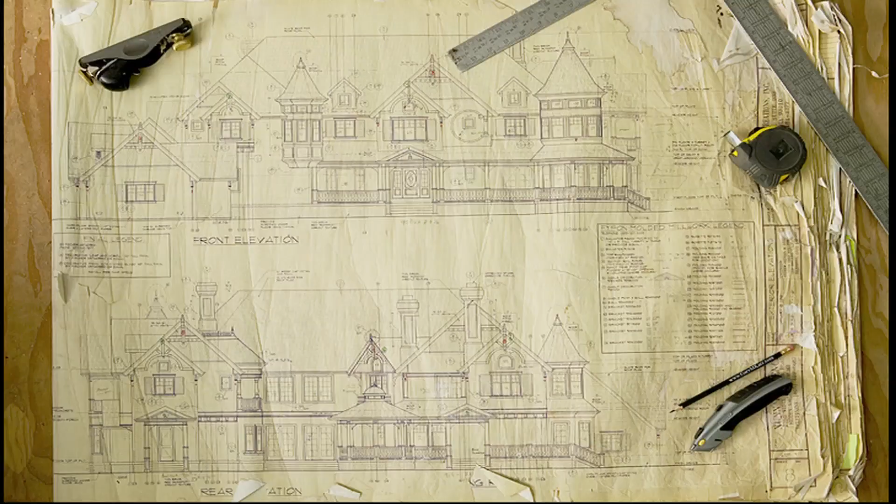Tell me the story, I know so many people don't realize that you were Stiletto, and still are in some ways, because it was you and Jimbo that actually originated that whole design. Yeah, and thanks for asking me that too, because a lot of people are confused about my involvement with Stiletto. I own Stiletto 100%, and anybody that worked for me was an employee. Stiletto was about the fact that I had this great idea and brought titanium to the market, but I was working to become successful, to make money, do all that.

Well, that's been done. What Martinez is all about is my legacy. I'm here to try and make the best tools and concepts that I possibly can, and Martinez is about taking guys like Jimbo. Jimbo was the original engineer for all my Stiletto hammers, and so him coming back over and working with Martinez is just the icing on the cake.

So this is basically heaven, because you're no longer driven by this monetary need and establishing a business. Now you're doing just what you think is right. Exactly. And once the monetary left, the creativity window just opened up unbelievable, and it's something that is amazing me, the responses of my end users and the feedback.

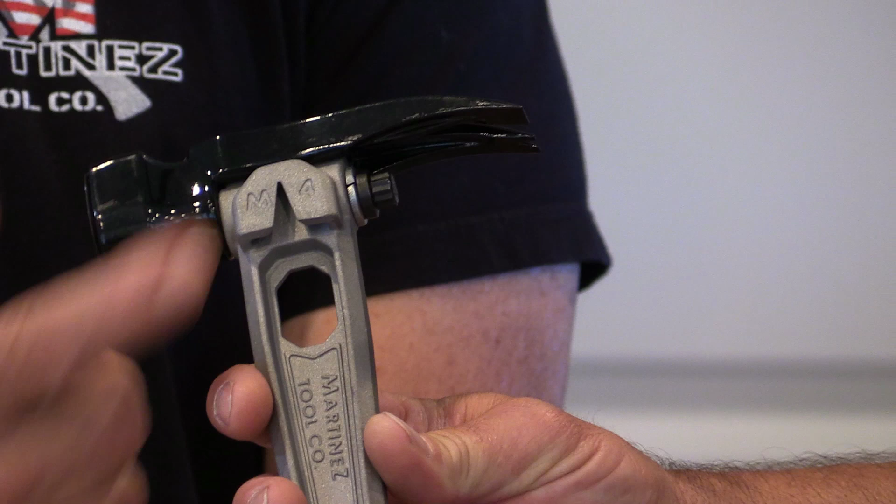The side nail puller is invaluable if you've ever pulled a nail, because you have 10 times more leverage with a side nail puller than you do with a claw.

Another feature that's really important on the M1 is the face is tilted back at approximately 5 degrees. The reason for that is nobody pounds a nail straight up and down, it's at an angle, so this is hitting square. You might not think that's a big deal, but that 5 degrees puts more of the surface of the face of that hammer on the nail and drives it faster than just a square face.

Only our framing hammer has the slanted face, because in framing you want to get as much on that nail as you possibly can in a production framing environment, to get the nails to sink as fast as you can. Every swing counts. Whereas with a finish hammer, that's not the case.

The M1 weighs within 2 grams of its competitor in titanium. Now with it weighing within 2 grams, most people pick it up and go, oh this is way heavier than your other one, but it isn't. What's happened is we've moved the weight from overall and put all the excess weight just up in the head, where you need it.

Because then you have a swing weight. Exactly, whereas before, with the other one, it doesn't have a swing weight. And what we were able to establish is that this swing weight ends up having a third more driving force than my previous designs.

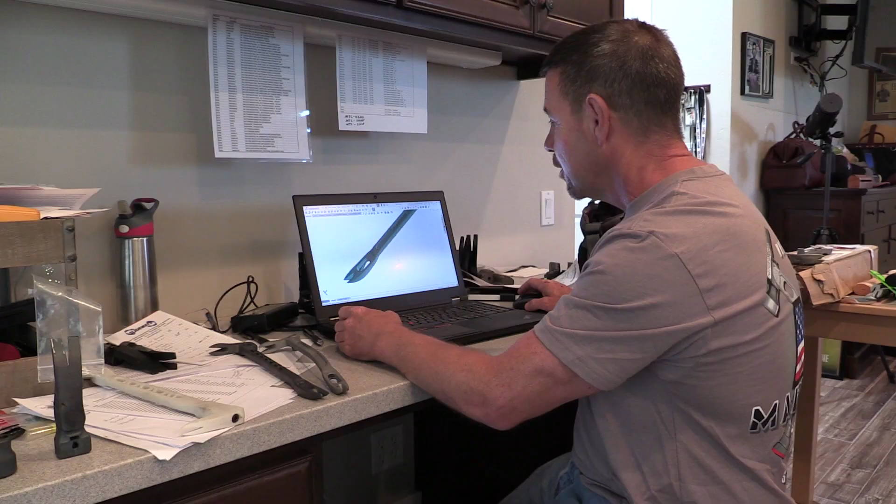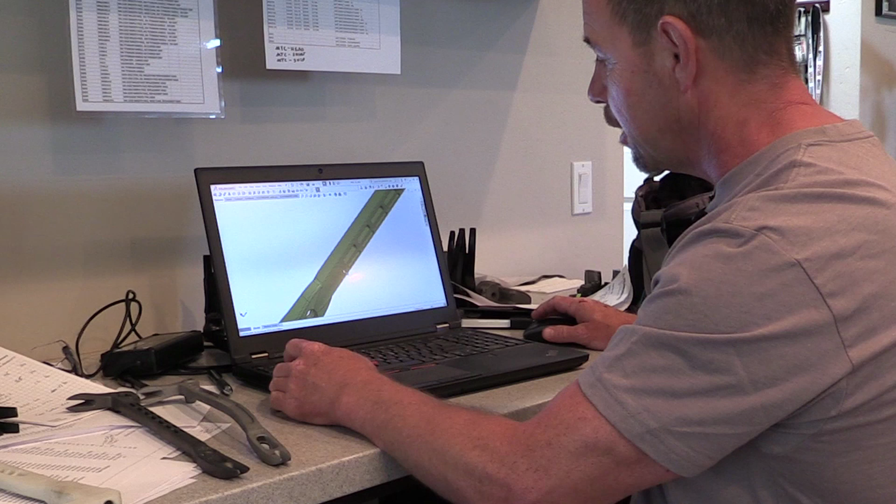Our first evolution of the new nail puller, we came up with this cross section of the handle. As you can see, when we jumped up and down on it to test it, it bent. So we came up with a new cross section with ribs underneath and on top, but all the highest stress and bending is on the outside surfaces. So right in this area here, and right here, we added skin strength by adding that section.

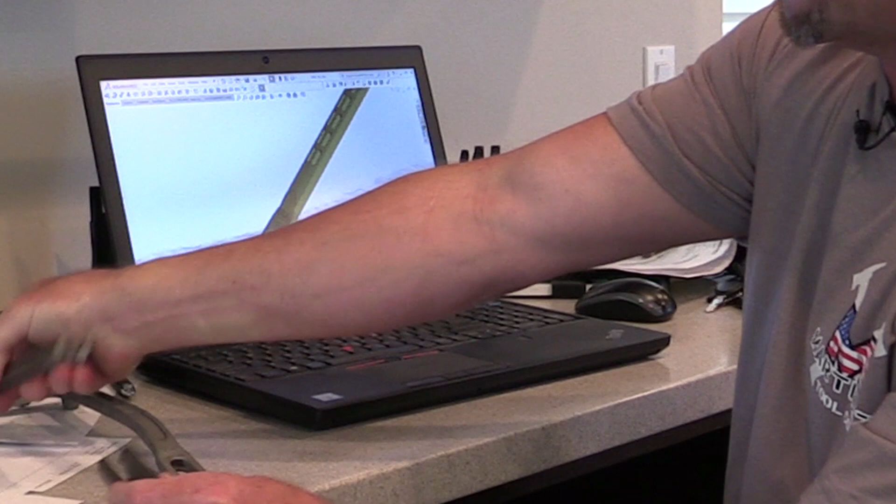So then we put a little different load on it and loaded up this area right here, and as you can see, when I was jumping up and down on it like a diving board, it snapped there. So the next evolution will be that we've added more material up here, right in this weak area where it's the thinnest section.

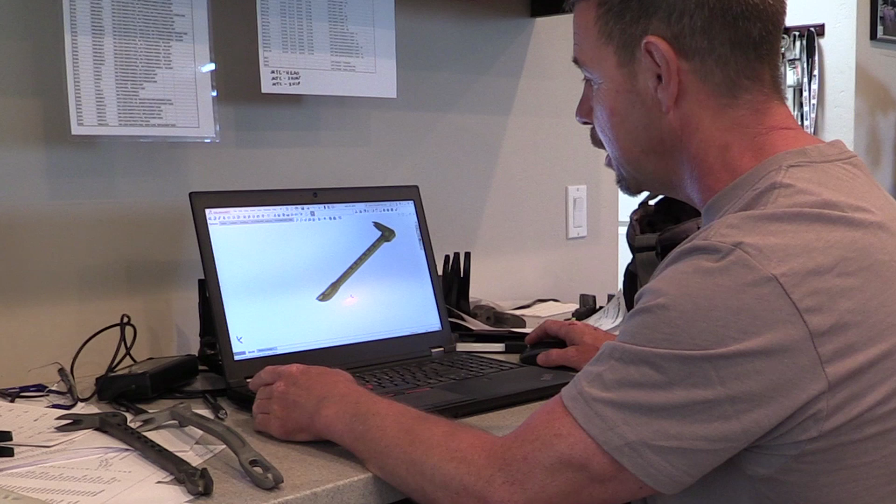That's our version 3 of evolution, which will be the new Martinez steel nail puller. It's got a side nail puller here, and this acts like another side nail puller, so you can get it started with the cat's paw, then pull it out completely all over the top using this secondary nail puller.

So we'll call for a new SLA and get this one poured out and tested within a week or so. Once we establish that, we're off to the races and this will be on the market.

Here's some of those SLAs from when we started coming out. What does SLA stand for? Stereolithography apparatus. Okay, what does that mean? A 3D printer. So that's the SLAs, that's the proper term.

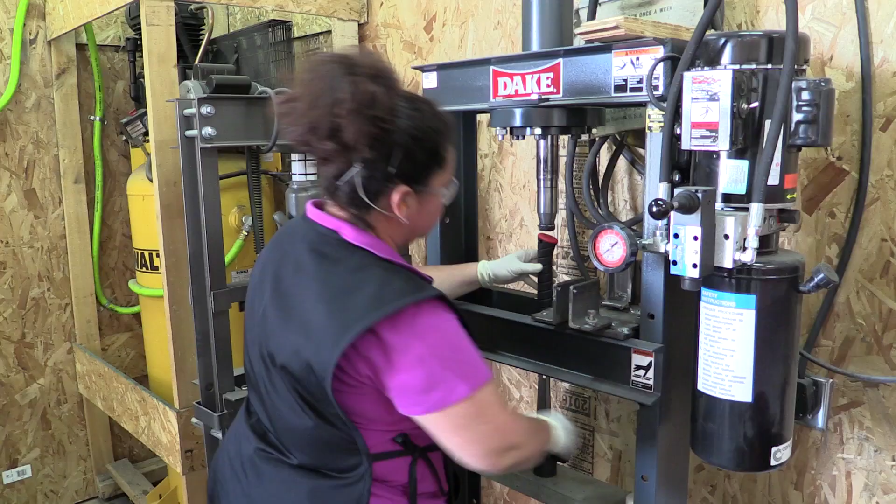These are my ladies. This is Teresa, Hi, and Tina. They are responsible for putting together all the Martinez hammers. So if you own a Martinez hammer, more than likely one of these ladies built it for you. They built all the Stilettos when I owned Stiletto, and I'm really happy to put them back in employment and happy to have them back. They're the joy of my life, I love these women.

All right Jim, so I know you guys make a lot of wood-handled hammers also. This is the machine that you made to drill out these wood handles? Right. How's this thing work?

So the challenge is we have a bolt coming down through the top that has to go through a threaded cross dowel here in the middle. So to try to do this freehand and line it up to where this hole will intersect that hole, it's kind of tough. Forget about it, especially over and over and over.

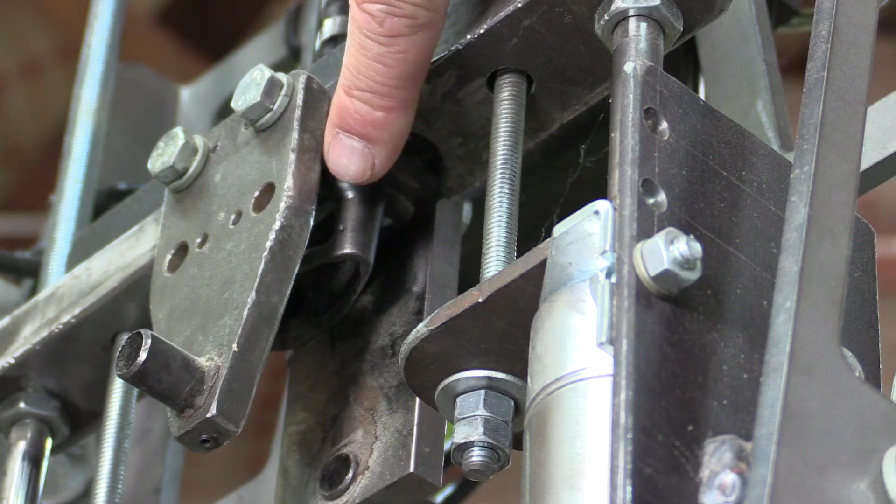Right. So what I did was I came up with a device here that has a press that cut off a hammerhead and welded it up inside of here. Genius. So then to set it up, you put a hammerhead up inside, and this is a press that holds it down in place. Then I have another linear guided cylinder here that runs an air motor.

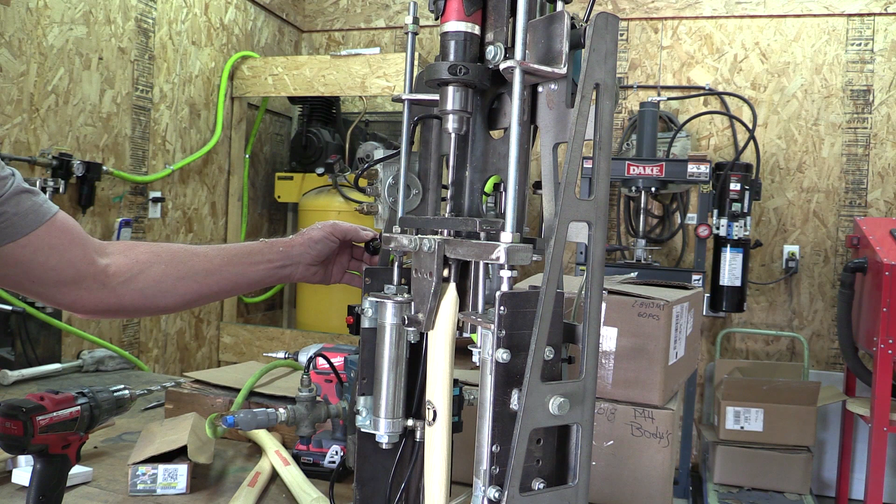So once it goes down, it starts drilling a hole. But first, you use a hand drill and you drill the cross hole. Use that little bushing right there to guide you? Yeah, a little drill guide bushing. Cross hole, and then the top hole that intersects it and lines up.

So you must be one of those hands-on engineers. Yep. I grew up in a family of engineers from Oregon State, 6th to graduate in my family. Wow. And I started welding when I was 8 years old and been building stuff ever since.

I had a guy who wanted to send his hammer back, and he wanted some stuff done to it and everything. So he kept calling me and asking me if his hammer had arrived. And I kept going, no, it hasn't arrived. But I had received a package from somebody, and I didn't know who, didn't know it was him, and there was this great big piece of LVL with his logo on it.

And I'm going, what in the world kind of package is that? I don't know. So I threw it in the corner and wasn't paying any attention to it till one day I looked at Jimbo. Jimbo goes, throw it up here. So Jimbo opens it, and when we took the screws out of this plate, lo and behold, his hammer was inside. He shipped his hammer in an LVL? He shipped his hammer in an LVL.

Now, is that the coolest shit you've ever seen? Come on. Pretty much the coolest shit I've ever seen. Yeah, with a steel plate. Yeah, and you know, that is what Martinez Tool is all about.

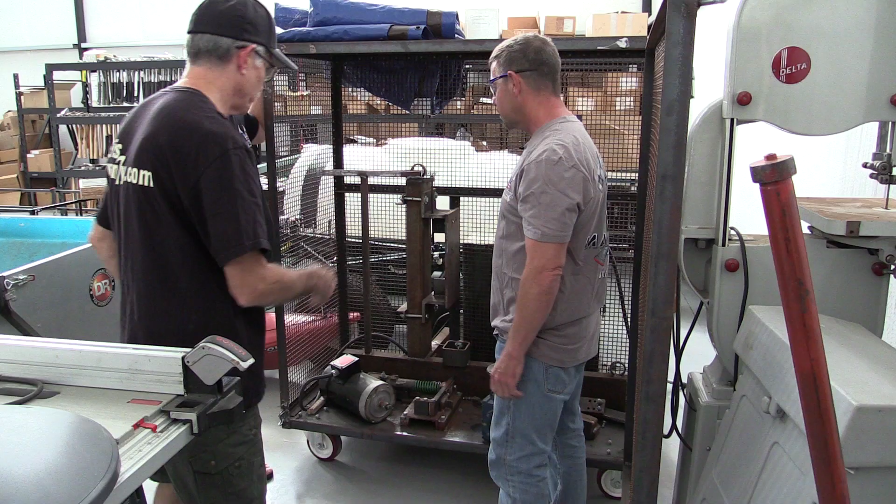So what is in this cage here? This is Thor, okay? Thor. It's our hammer testing machine. We've got it torn down right now because we're working on some strike plates and some readers to know what type of energies we're getting.

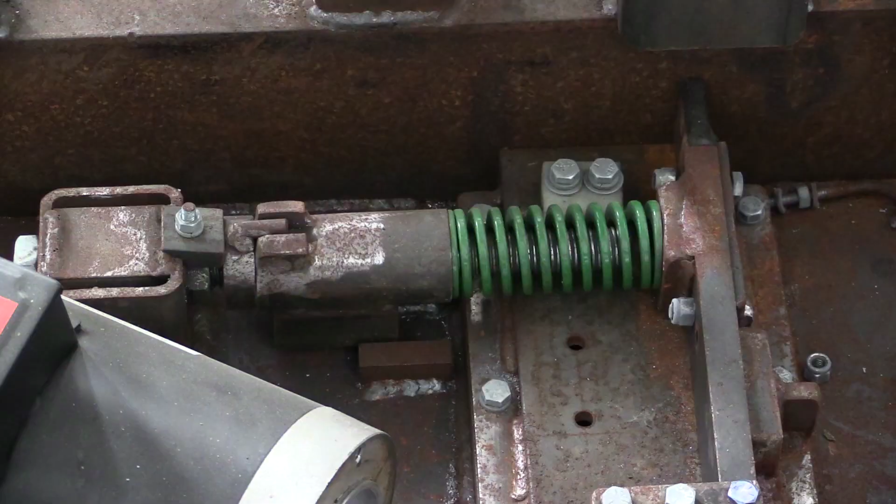To measure force and everything. Right. So basically what it has is a calibrated die spring. When it gets compressed, the amount of deflection tells you how much force it takes to compress it. And then I've got, kind of like on the old school race cars, you had a little tattletale on your tach. So I've got a little metal rod back here, so when this plate strikes and moves it, it'll stick to wherever it moves, so you can measure how far it actually moved to calculate how much force the spring had to take.

So we can put a variety of different hammers in and change the speeds to strike this plate. There's a fiber optic sensor back here, protected in this tube when things fly apart, and it's got a little PLC that counts it, so it keeps track and keeps data points so we can measure how many times it hits. Oh, you mean this isn't just to strike once? No, thousands of times. It's got a rotary arm with a spring-loaded elbow, so every time it hits, it records a count on the PLC, and if it doesn't hit within 3 seconds, it shuts off because that means something broke.

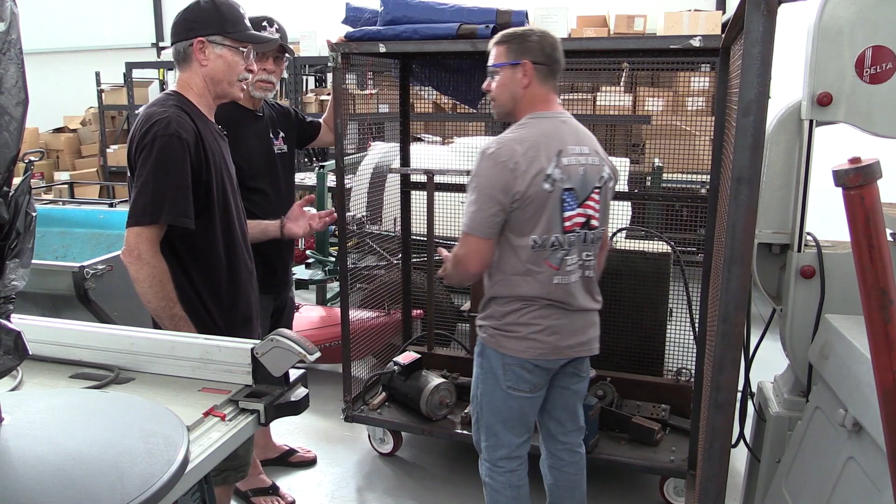And how many thousands of times does it strike? Yeah, so this is how you test your hammers? Yeah, right, this will strike as many times until either you shut it off or it breaks. We go up to a variety of different tests, and we were at 17,000 strikes when the input shaft on the gearbox broke.

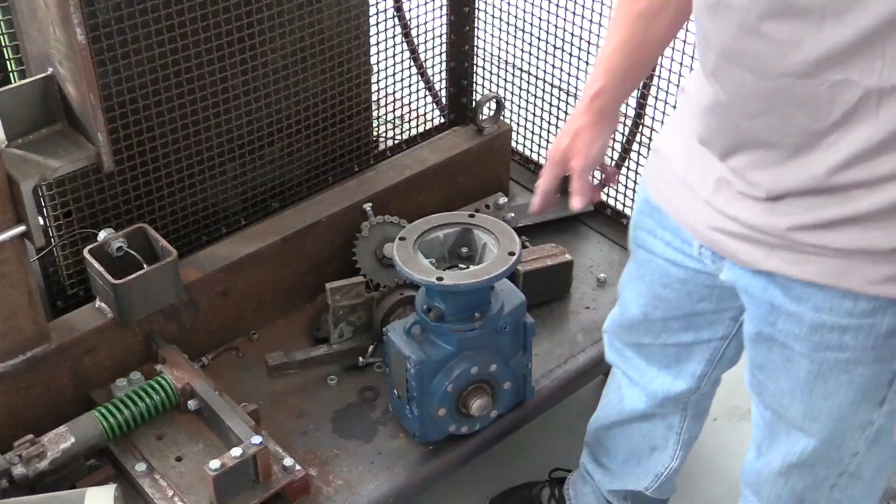By the calibration of that spring, this is how we determine that the Martinez hits a third harder than a stiletto. Because if you put that PLC at 30 hertz, a stiletto won't cycle on this, but if you put a Martinez in there, it cycles at 30 hertz. You have to turn the stiletto up to 60 hertz in order for it to cycle. When we were testing the M1 handle, after a little over 17,000 hits, that's when the input shaft on the gearbox broke.